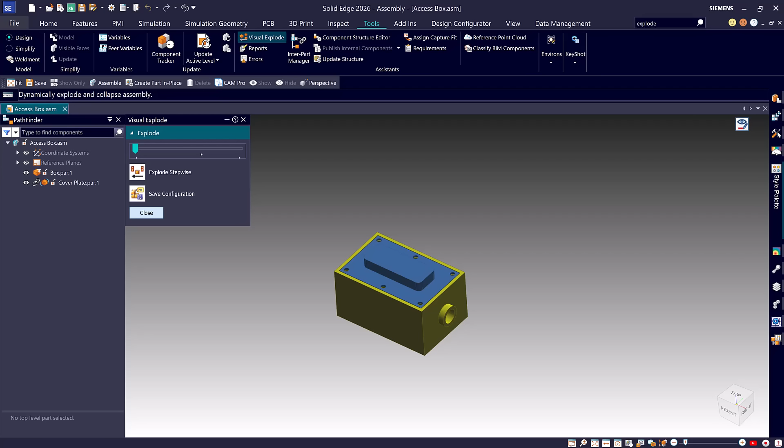In Solid Edge, we have the assembly of a control box and its cover plate. Our job is to create a CNC program for the cover plate. We will do that in Designcenter X Essentials, the full cloud CAD and CAM system from Siemens.

First, we send the cover plate to X Essentials. Then, we open the file.

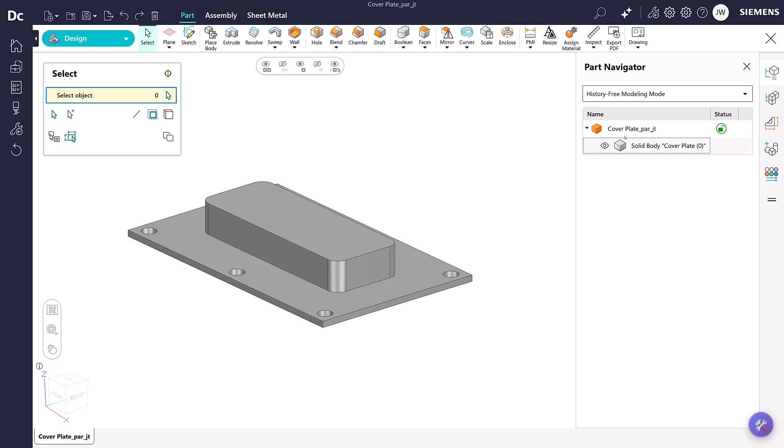Next, we create a machining setup for the plate. We first choose the type of machine control that we will be creating this program for. Next, we define the machine origin, or program zero.

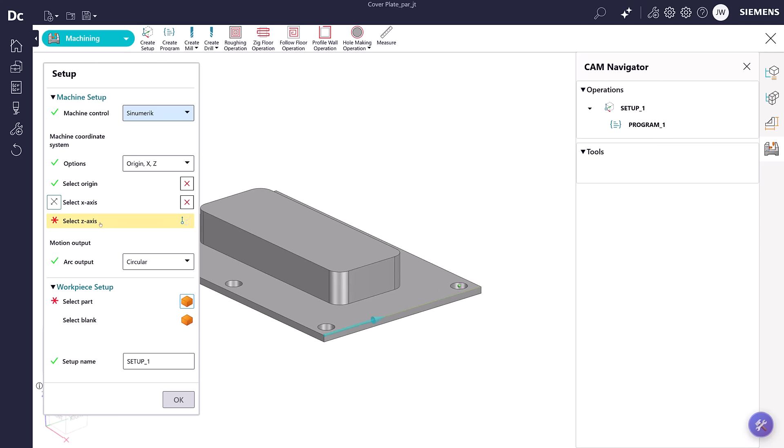Then we select the object that we will be machining, in this case, the cover plate. Before we can create tool paths, we must define two cutting tools, an end mill and a drill. First, we create the end mill to match one that we have available in our tool crib.

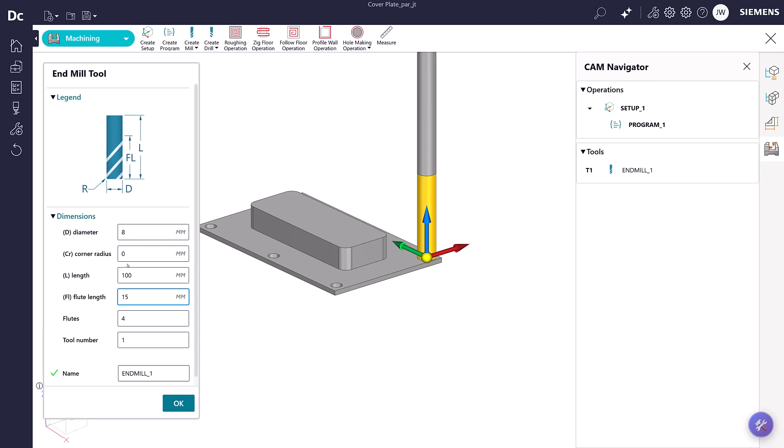For the drill, we need to know what size. We can use the measure function to determine the drill size we need. We create the drill, setting some parameters as we do.

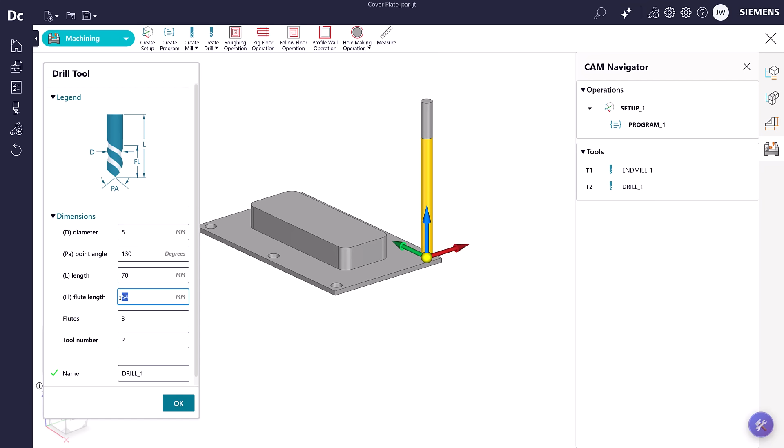Our first operation will be to remove a large amount of material from around the rectangular boss. We will use a roughing operation for that work.

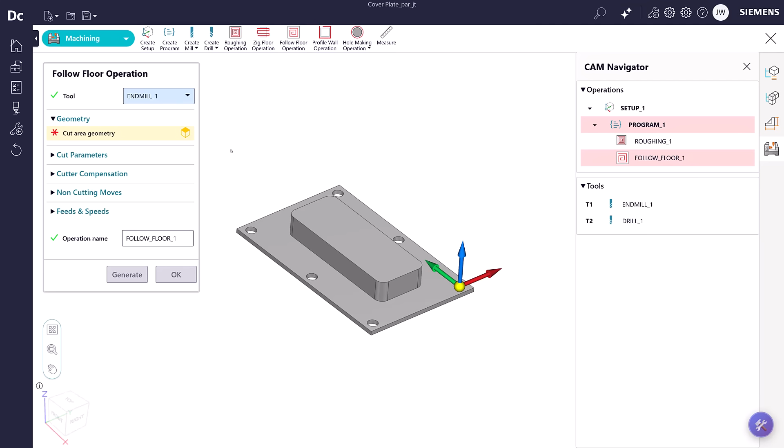We can now apply a nice finish to the top of the rectangular boss using a follow floor operation. Finally, we can finish up this side of the cover plate by drilling the holes. Notice we do this after the roughing operation, so we have less material to drill through.

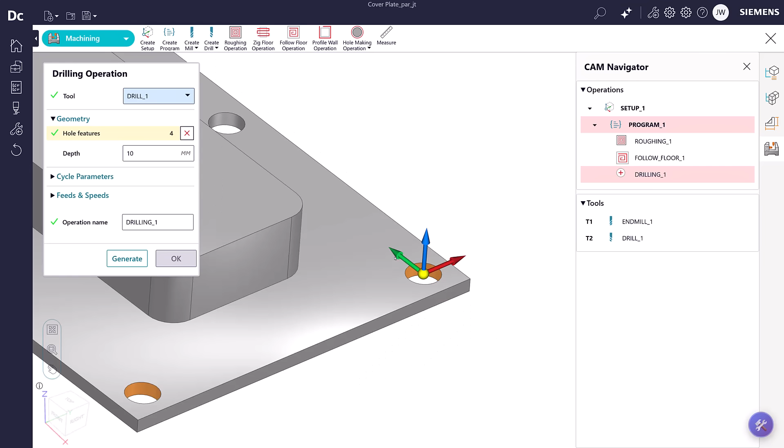We flip the cover plate over to do more machining. We create a second setup for this side, being careful to set the machine origin properly.

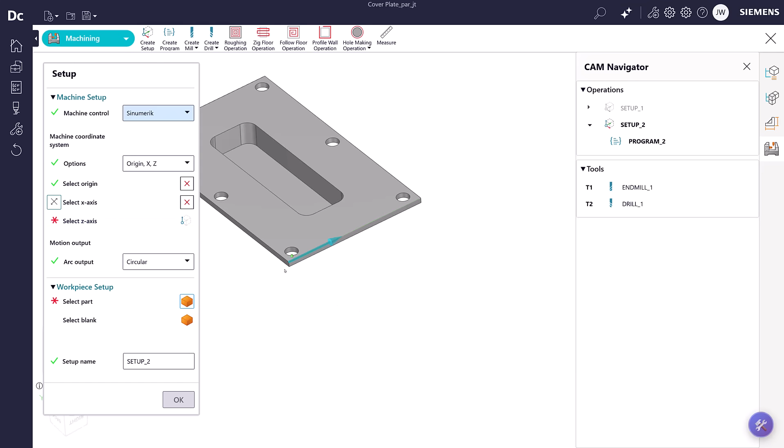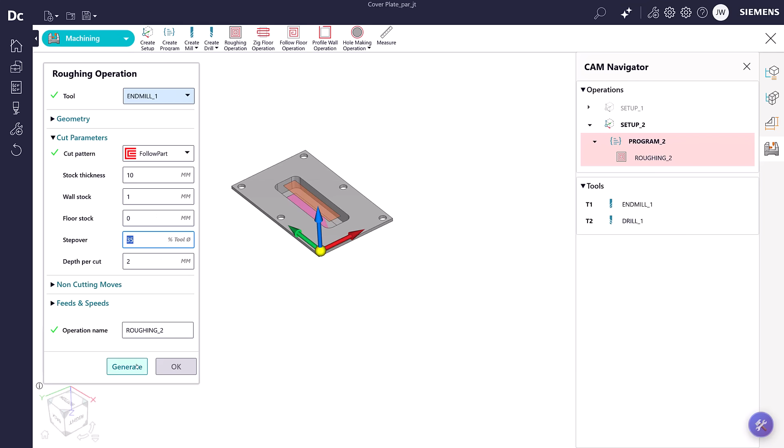We still have a lot of material to remove from the rectangular cavity, so we will use the roughing operation again, with the same tool. We can use a profile wall operation to make sure the sides of the cavity are accurate.

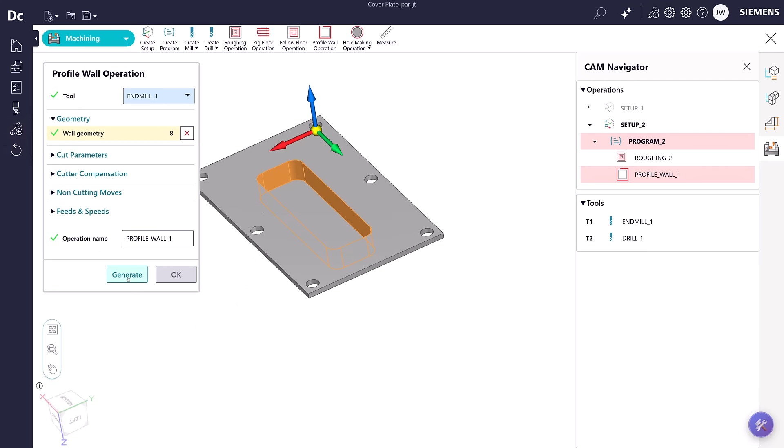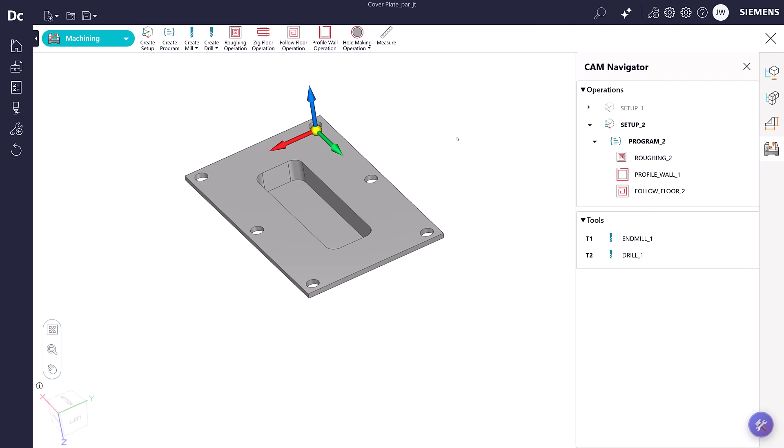Finally, we will use a follow floor operation again to finish machining the face of the cover plate. We save the file, and now we can bring the powerful capabilities of NX CAM into the fray.

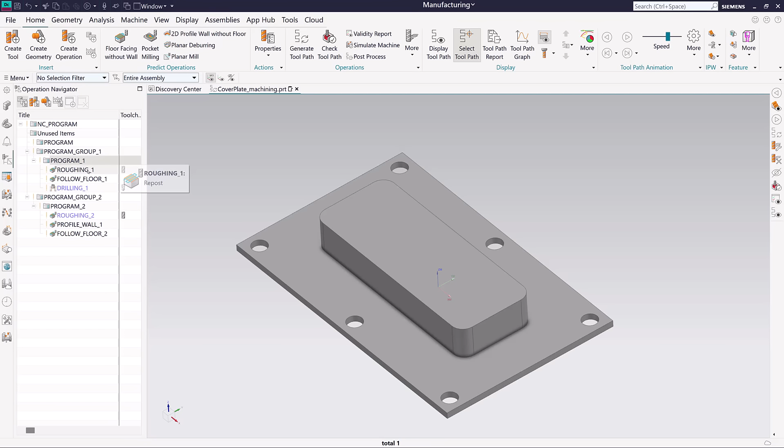Every file created in Essentials is fully readable by NX CAM. There is no loss of data. NX CAM also has extra capabilities not found in Essentials, like simulating material removal. Each operation created in Essentials is a full-blown NX CAM operation with all of the bells and whistles.